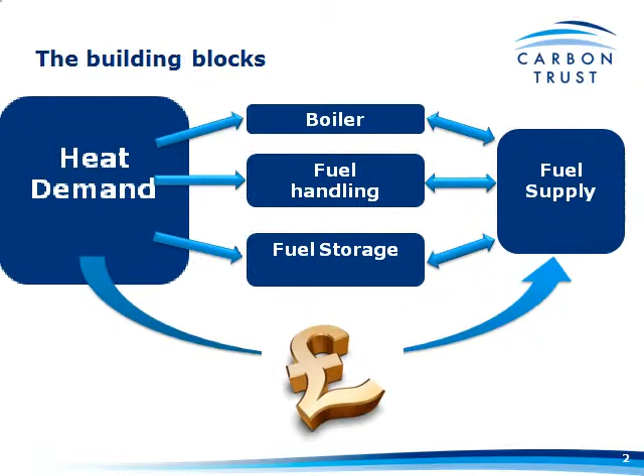Your starting point might be, well, I burn this much gas, and well, how many tons is that? That means I need 7,000 tonnes of wood chip, for argument's sake. Another simplistic starting point might be, well, I've got a 10 megawatt boiler, so I need a 10 megawatt biomass boiler. That's simple. It gives you a feeling for the extremes, but you might end up with something this big, whereas in reality, you might need something that big.

So this will equate with you, Richard. I took these pictures in Canada. It was also the direct relationship between digger size and boiler size and nursery size, if you like. But what I'm trying to lead through is just a few sort of approaches as to how you might size it, and some numbers to think around and bounce around, if you like.

But you might be surprised the number of people whose first thoughts are something like this, and you can get scared off by the numbers. Never mind the fact that you need 7,000 tonnes of wood, or it's a 10 megawatt boiler and it's going to cost me however many £1 million or more. The optimal sizing and going through this whole process is very important to getting a successful job.

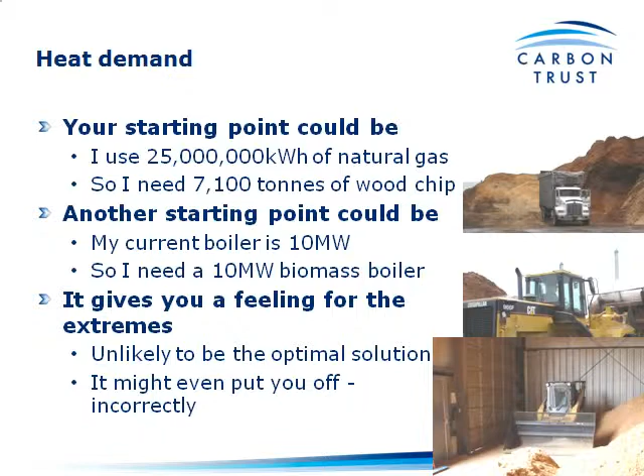Now, as a bare minimum, we really ought to be looking at your weekly heat demand. Now, I've got my typical 5-hectare nursery, just as an example. It's some real data from a site, just to give us some sort of vaguely sensible numbers to work with. Well, at the very least, weekly heat demand is what you need.

And you look at that graph, and if you said, all right, well, I want to do everything from biomass, then that's a big boiler that's going to be twiddling its thumbs most of the time. Probably not the most sensible solution, unless you aren't going to have any alternative heat source at all. The other extreme could be a boiler that's just going to satisfy the lowest week. And again, the chances are, you're not quite getting the benefits of economies of scale down that end of the spectrum. So the answer is going to be somewhere in there. And the ultimate question is, where within that band?

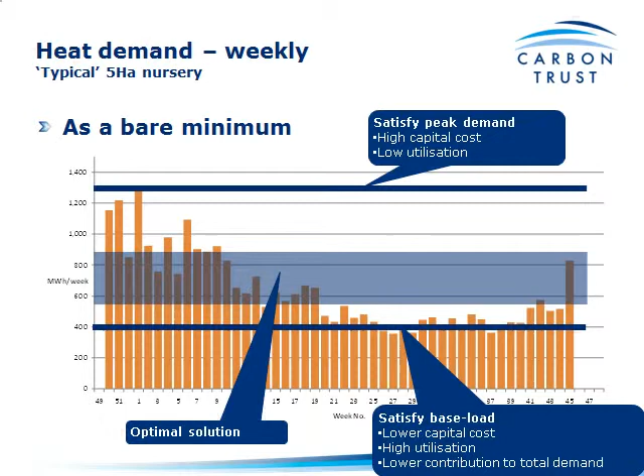Then you might say, well, let's look at the pattern of heat use within a day, because that's quite important to us. A winter's day, for example, well, if I put in a 4 megawatt boiler there, that's not too bad. The lowest point is a shade under 2. That's about half the output of the boiler, and as Matt will tell you, that's a reasonable place to be. You wouldn't want to run a biomass boiler at less than, say, 30%. So actually if I put a 4 megawatt boiler in for that, practically speaking, it would work. Might still be a little bit oversized.

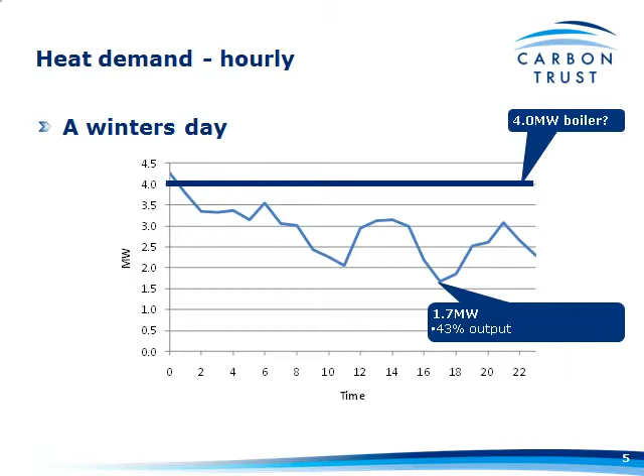Well, then a few weeks later, you end up with days like this. And all of a sudden, you've got your 4 megawatt boiler. You want no heat at all from it in the middle of the day. And you can't just turn them off and light them up, like you do with your gas or your oil-fired boiler. So what happens then?

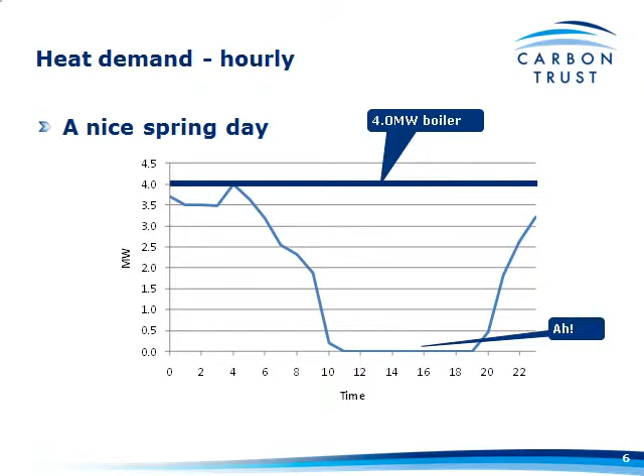So throwing a few more numbers around, if I put my 4 megawatt boiler in, if I run it flat out for 24 hours a day, that's near as damn it 100 megawatt hours of heat per day it could give you. Now that winter day that I showed actually had a total heat demand of 69 megawatt hours. So actually a 3 megawatt boiler would have satisfied that if it had run flat out 24 hours a day.

That spring day, following similar numbers through, actually a 1.7 megawatt boiler would have kept that spring day happy. So quite a massive variation in boiler sizes that you might consider that can have quite a big input into your annual heat demand. Now, how do we facilitate that?

Well, the edible growers among you, you have heat stores. That's part and parcel of being an edible crop grower. You use them as part of your CO2 enrichment facility, if you like. If you don't have CO2 enrichment, then you may not have heat stores at the moment. That could be a little bit more of a novelty or difference to you, and also an extra cost element that you have to consider that edible crop growers don't necessarily.

But from my angle, from getting the right size boiler for the job, heat stores are a very important part. And as Matt will tell you, they're also an important part of having a relatively pain-free, easy to manage installation in the short and the long term. So keep those sort of numbers in your mind, sort of 50 to 100 megawatt hours per day, for my 5 hectare nursery, if you like.

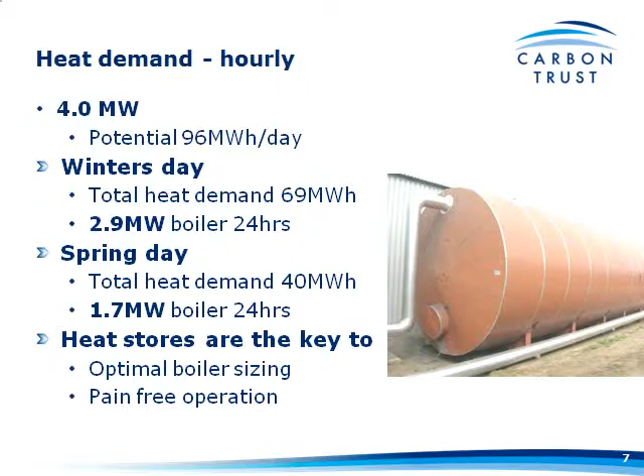So yeah, that's how a heat store works. We say, right, we've got this quite small boiler. It's running flat out all the time. Surplus heat here goes into the heat store. We need more than the boiler can do in these bits. We suck it back out of the heat store. In concept, it's quite simple.

Yes, Richard. Could you just hold on a moment? We need to record your question.

For this kind of example, what size of heat store would you suggest? Is it comparable with a gas setup? I'm getting there. You're 3 slides ahead of me, so we're well attuned to each other. I'll lead you through this, and hopefully I'll answer the question for you. If I haven't, do shout up again.

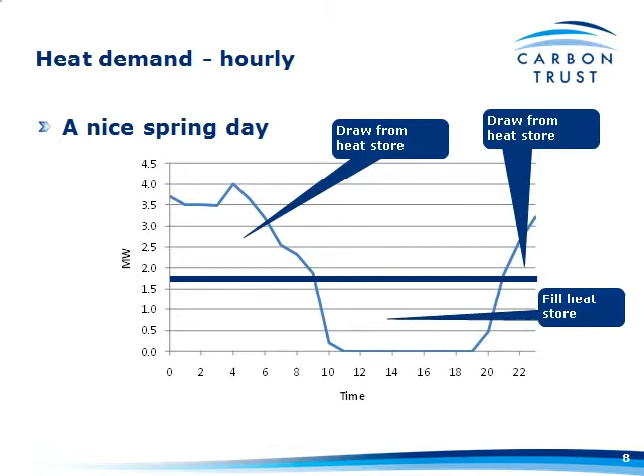So some rules of thumb on heat store size, just to put a few things into perspective. If you have a 1,000 cubic meter heat store, nice round figure, and you have a working temperature range of 90 to 45, there's a formula to work it out if you want to do it yourself. But the answer is 1,000 cubes will store 52 megawatt hours of heat under those conditions. Previously, if you remember, we were talking about 50 megawatt hours as the demand on my nursery on a spring day, possibly 100 megawatt hours on a winter day.

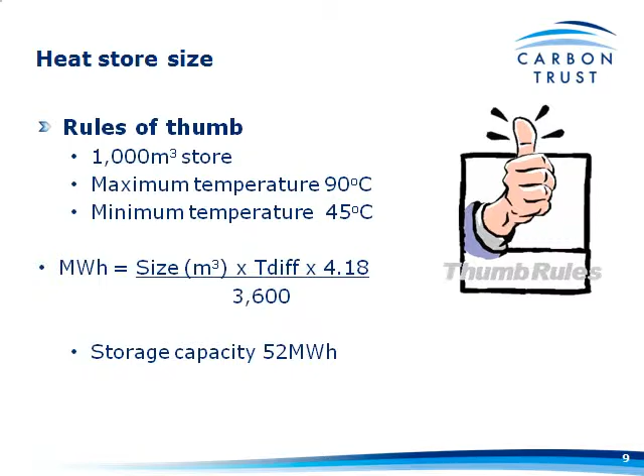In the middle of winter, back on that very early graph, a demand of 500 megawatt hours of heat a week wasn't far off if you ignore the really high ones. That's about 70 a day. Now, bear in mind, you don't need to store the whole day's worth of heat demand. You just need to take the edges off.

There's still a low level demand in the middle of the day that's taking something from the boiler. So you might need to store about 30% of your daily demand in that winter heating situation, just as an approximate figure. What does that work out at? Well, that works out at about 400 cubic meters for my 5-hectare nursery, or 80 cubes a hectare.

Now, that's a few numbers, a few examples, and that 80 cubic meter a hectare figure, if we compare it to the standard rules of thumb for an edibles nursery, the figure often quoted for an edibles nursery is 200 cubic meters a hectare for CO2 management purposes. So if you've got anything near that, you've already got plenty of heat storage.

If you haven't got any heat storage at all at the moment, you're an ornamentals grower, for example, you don't want to be putting massive heat stores in that aren't going to deliver you a decent return on investment. So we need to know a bit more tightly, let's say, as to what you actually need.

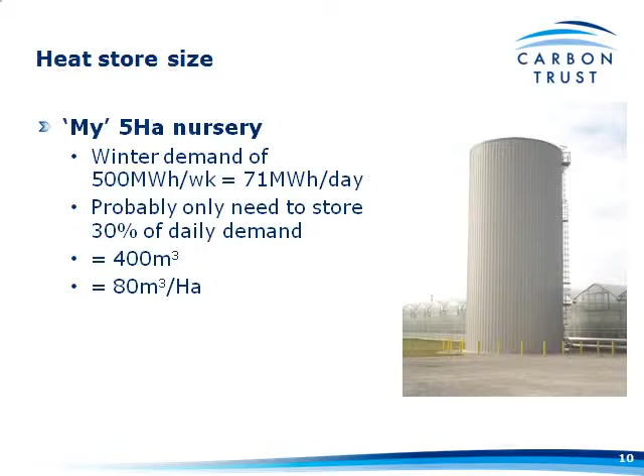Now, as I said right at the beginning, the ultimate answer is very site specific. It might, practically speaking, come down to, particularly if you're using a second-hand heat store or a tank used for other purposes, ultimately what you can physically fit in, what's available. But we can drill down to it much more closely.

A few years ago now, we did some work for HDC looking at biomass boilers and sizing of them and the heat demand patterns of a handful of edible and ornamental nurseries, and worked through boiler sizings and heat store capacities and what have you for each one of them.

Now, as a very simple rule of thumb, the optimum boiler size is about a third of your peak heat demand. Don't assume that your current boiler capacity is your peak heat demand. The chances are it's quite oversized for what you actually need nowadays, particularly if you've been putting in thermal screens or shade screens or what have you.

The old rule of thumb of 2 megawatts a hectare of boiler capacity for a high temperature crop is probably way over capacity now. So your actual real peak heat demand figure is what you need to get hold of. Don't just look at what your current boilers are plated at.

In terms of heat stores, well, actually anything much more than about 50 cubic meters a hectare, from the point of view of managing and getting extra output from your biomass boilers, doesn't really deliver that much more. You get the exponential curve and it starts to flatten out, and any further investment in heat storage beyond that didn't show a sufficiently large increase in utilisation.

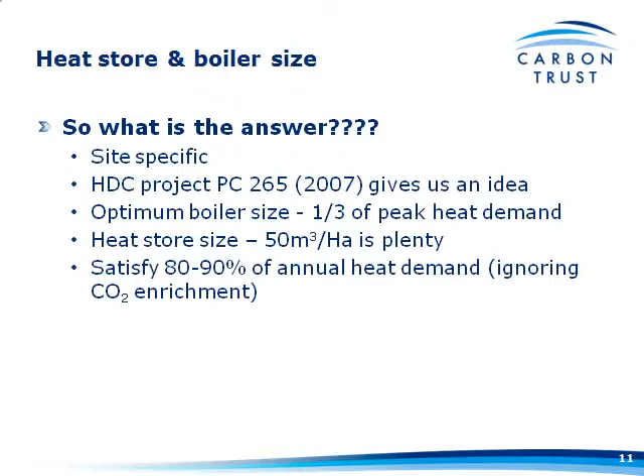Now, CO2 enrichment is an important factor to edible crop growers in particular, so we can't ignore it. As we stand, burning wood chip, straw, what have you, using the flue gases for CO2 enrichment from them is not currently proven. I was almost going to say possible there, but we are doing some work looking at that, and I'm increasingly convinced that it is technically possible.

And I think it's only just round the corner that it will be possible to do, but you are looking at some fairly hefty capital costs and running costs to allow you to do that. So as we stand here today, the assumption is you can't use CO2 from the flue gases on biomass boilers. So what impact does that have? Well,

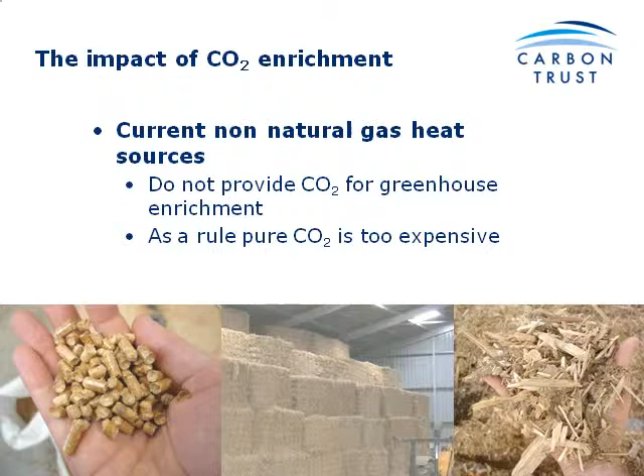Clearly, you've got the benefit of having a heat store, whereas ornamentals growers would have to pay that, but then ornamentals growers can use their biomass boiler through the summer if you do have a good solid heat demand through summertime, which sometimes isn't the case for bedding growers and the like.

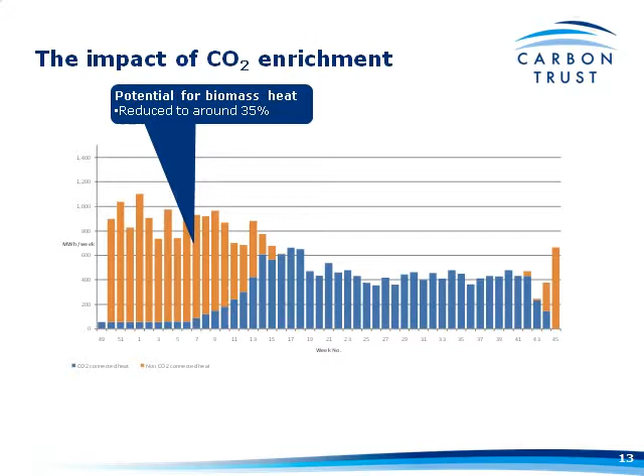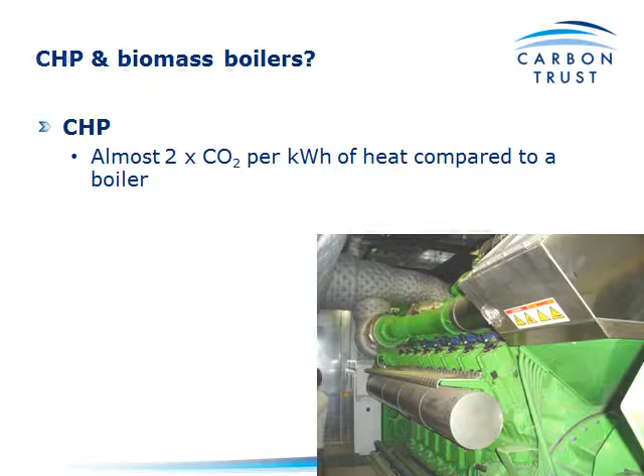Now, this is a biomass boiler workshop, and now I'm going to mention CHP very briefly. But CHP gives you twice as much CO2 per kilowatt hour of heat that you've got to do something with. So, if I had a CHP that delivered the same amount of CO2 as burning that much gas would have through a boiler, that's the amount of heat you put into the system. But you won't need more heat than that in the nursery. So it means that all this orange bit is suddenly open to a biomass boiler.

So perhaps a little alternative thinking about CHP from what we've become used to in the past means that CHP to give you as much CO2 as you're used to, combined with a biomass boiler, could leave you with the same CO2 enrichment levels, same yields, but lower overall energy costs. Obviously, significant capital requirement for CHP, but it's an interesting synergy there.

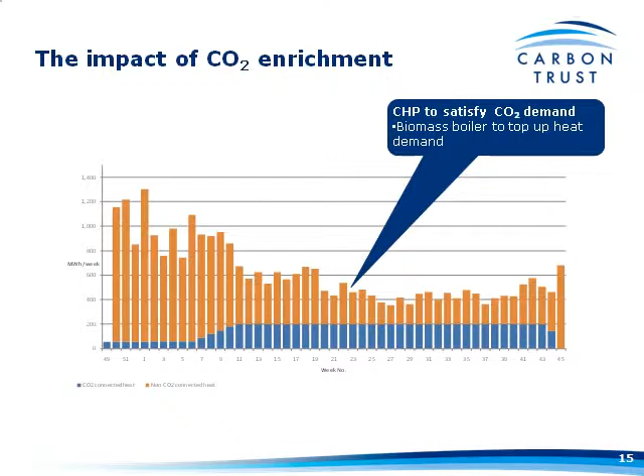Really, to wrap it all up, if we go through the numbers for my hypothetical 5-hectare nursery, I'm saying, right, I needed 25,000 megawatt hours of gas. That's about 500 kilowatt hours a square metre. So on the high side for many ornamentals nurseries, and on the reasonably efficient side for edibles nurseries.

If I put in a boiler that's about a third the size of my peak capacity, so a 3 megawatt boiler, I satisfy 80% of my heat demand, so I haven't got a CO2 issue. I'm going to need about 5,700 tonnes of wood chip. If CO2 enrichment is an issue to me, it might bring us down to 40%, so funnily enough, it's half as much in terms of tonnes of wood chip. So these figures start to give you a feel for the actual numbers involved, and John's going to use these in some of the examples that he works through later this afternoon.

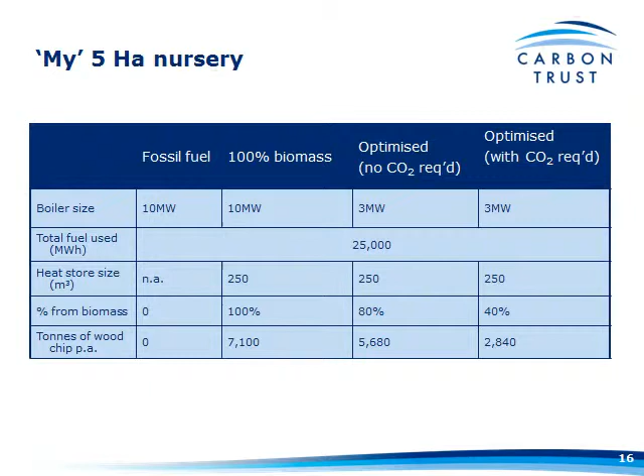So just to wrap this up, really, heat demand: very important to know your heat demand in as much detail as possible. If you don't have even weekly fuel readings, whatever that fuel happens to be, do it when you go home now. So whether it's Matt sizing a boiler, or Glyn, or ourselves doing things, the ready availability of that type of information is absolutely vital to working out what the best solution for you is. Yeah, the more data, the better. We regularly extract data off greenhouse computers, for example. Yeah, pipe temperature data and the like.

I mean, it depends. Sometimes, as you might see this afternoon, the simple numbers might look good enough to you. So, well, actually, even if we're 20% off, it doesn't matter for argument's sake. But the more information, the better. You can be sure of getting things sized in the best possible way, and ultimately getting the best possible result financially. And practically, the least hassle.

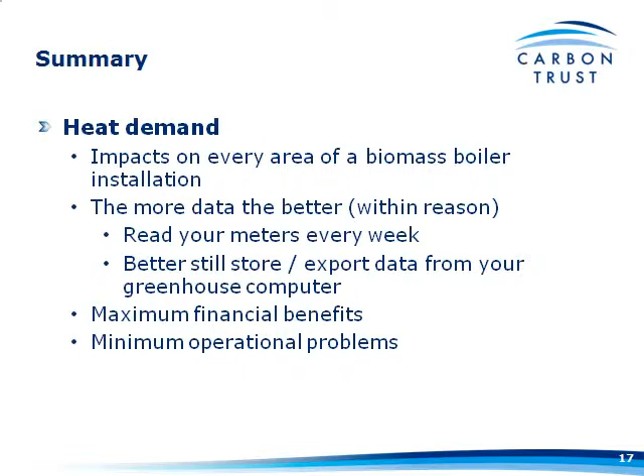Finally, energy efficiency still rules. Don't think that cheap heat sources mean that energy efficiency isn't quite the focus point that it was. Energy efficiency generally takes the top end off your energy use. If we're sizing a biomass boiler correctly, that's the bit of energy use that would still be satisfied by your gas boiler, your oil boiler, or whatever it happens to be. So, yeah, it will reduce your energy costs. It will also reduce the size of boiler that you need, and therefore reduce the capital and all those sorts of things as well. So, keep your mind on using less heat, no matter where it comes from.

That's that piece. Any questions? Did we answer your heat store questions adequately? Marvelous. Anybody else? No? Right, well, we'll move straight on to Matt.